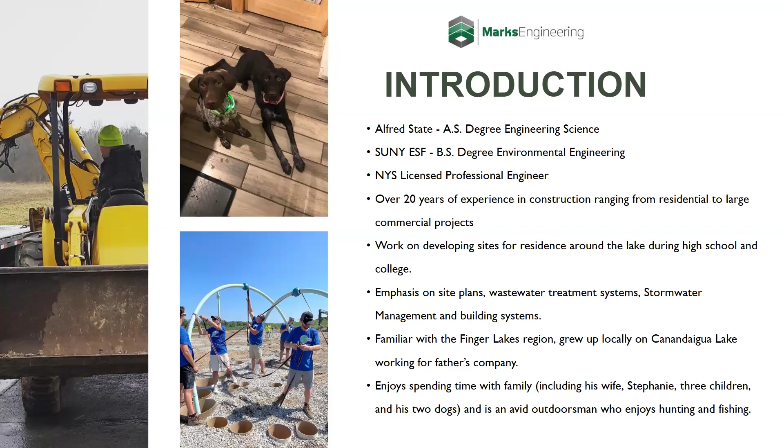So today we're going to talk about stormwater. First I'm going to talk about what is stormwater, do a little bit of definition, a little bit of explaining there, what the pollution is of concern, talk a little bit about regulations, what we can do to control erosion and sediment during construction, and then get into the site design aspects that we can do to enhance our new sites or retrofit some old sites with green infrastructure, which will include infiltration systems, filters, grass filter strips, rain barrels, pervious pavement, landscaping, and then we'll also talk about things we can consider going forward.

So what is stormwater? Stormwater is, by definition, runoff generated when precipitation from rain and snow melt flows over land or impervious surface without percolating into the ground. So that's just a general definition. But over here, I got some pictures. The big thing about stormwater is if you've got an open lot, it's grass, it's trees, rainfall is going to fall on it.

Most of it's going to soak into the ground and go into groundwater or run off slowly to streams or water courses. But when we develop these with parking lots and buildings and other impervious surfaces, we get stormwater runoff, and that runoff doesn't have the opportunity to soak into the ground. It doesn't have the opportunity to be taken up by the vegetation and cleaned of its pollutants or nutrients. So just a general, not a rule of thumb, just to try to make light of the situation.

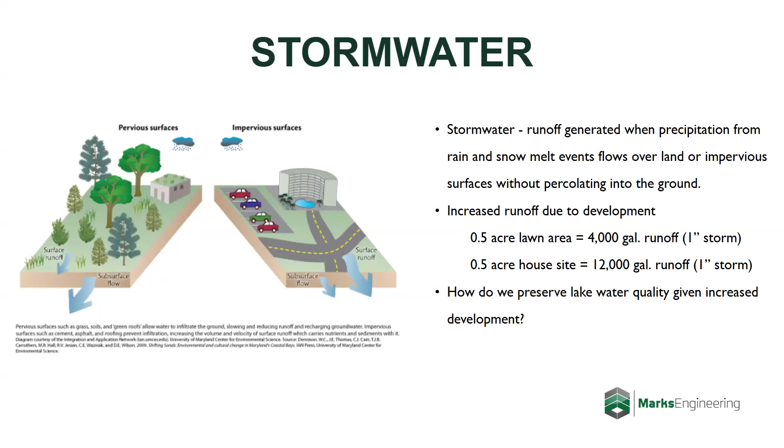If you have a half acre of lawn area, in a 1 inch storm event, you're going to get approximately 4,000 gallons of runoff. If you have a half acre house site, which is 30-40% impervious, you're probably going to get 12,000 gallons of runoff. So you're looking at like a 300% increase there for that 1 inch storm event. So that is just kind of a magnitude of how the runoff will be affected after you develop a site. So how do we preserve the lake quality or waterway quality given the increased development? That's what we're going to talk about today.

You've got natural erosion, right? You've got large storm events which erode stream banks, and we're also not going to talk about that. That's a naturally occurring erosion. What we're talking about is the developed sites and what kind of stormwater may be coming off of your house site or a new parking lot. So impervious areas are a big contributor to stormwater pollution, where you've got pet waste, fertilizers, motor oils, detergents, chemicals, litter on those impervious surfaces. And then that just basically gets washed off in a storm event and gets into the nearest storm drain and ultimately the lake.

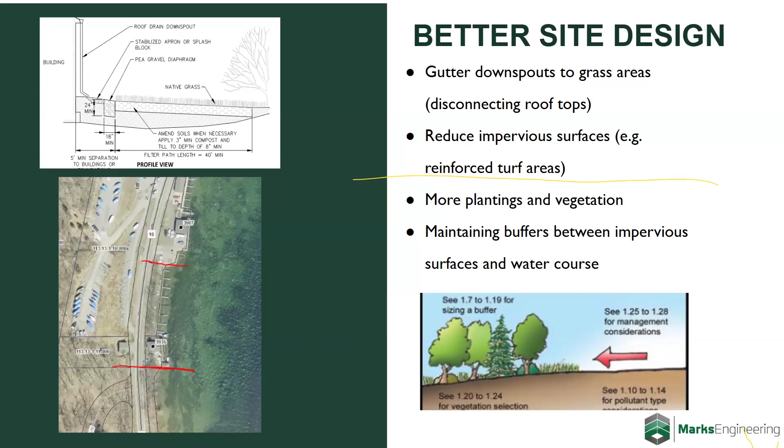So there's green infrastructure for. See if I can get that out of there. Hang on.

Well, I can't. So green infrastructure for small projects, retrofits. So that's one of the things I wanted to focus on with this presentation: what can you do as a homeowner on the lake or a homeowner on one of the streams or tributaries? What can you do to help reduce your stormwater footprint and help reduce the pollutant and nutrient load that's going into the lake? Or if you're building a new site, you'll see some of these things implemented, and you'll understand why we're doing that and what we're trying to achieve.

So we'll talk about rain gardens. I know it's a buzzword. Everyone kind of talks about it. Let's put a rain garden in, and they're very helpful. They're a really great retrofit. They look awesome. A lot of times when we're designing new sites or doing retrofits or renovations, we're also doing infiltration trenches, which work the same way as your septic system. Basically, water goes in and it percolates into the ground. Grass filter strips, those are common. We're going to talk about pervious pavements. We're going to talk about vegetation and tree plantings.

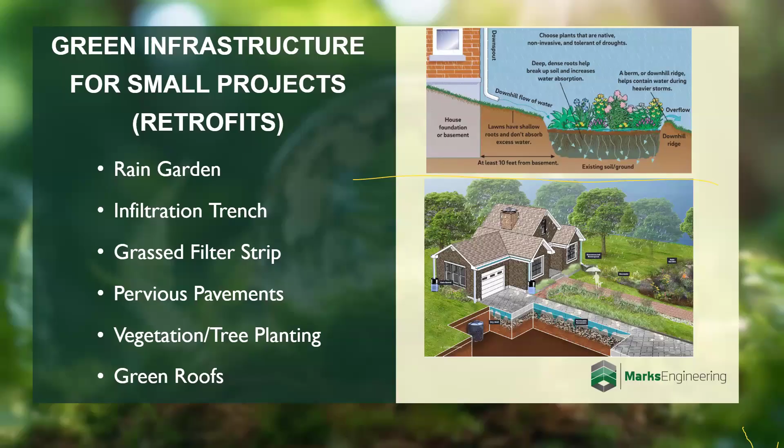I have green roofs on here. They are a green infrastructure practice. I'm not going to talk about them too much. They have more of a commercial application, so there are very limited green roofs in residential. And if you need to talk about it more, I'll be glad to answer offline questions.

So the rain gardens, very simple. Your downspout or roof leader or even a culvert or drainage pipe coming off site goes out across the ground and into an area which is depressed, which is lowered. It's designed as about 1 to 2 feet deep. It's got a bunch of wetland planting mixes in there. It's got usually some type of a mulch, whether it's hardwood mulch or stone mulch. You've got a 12 to 18-inch filter media, and then you've got a collection area, which is usually gravel, where it percolates into the ground.

And if you don't have great percolation, or if you don't have great soils for that to be absorbed in the ground, often we'll have an underdrain in there to siphon that water off the bottom of the practice. But the biggest thing is it's allowing it to filter through a sand media, filter media, which we know sand filters, like we use those for septic systems, they remove a lot of our organics and our nutrients and filter the water. They're very easy to install.

They're very attractive. A typical 2,000 square foot house needs about 100 cubic feet, which is about a 10 foot by 10 foot area. It's about 2 foot deep. Obviously, you've got grading outside of that. A rough order of cost would be about $10,000 to put one in. Obviously, site specific. If you've got a lot of grade to work with, that's going to change. But they're a relatively easy practice to implement.

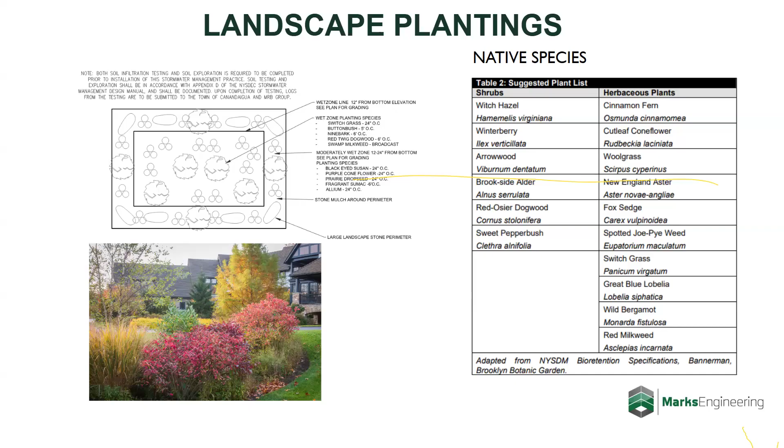So I'm going pretty fast here, but landscape plantings, we will specify planting zones. We have a lower zone, which is going to be your wet zone, where we want to put our plants that can have wet feet and tolerate being wet, which are your switch grasses, your button bushes. And then there's a moderately wet zone, which is going to be a little bit higher than that. Those are more your upland species or emergent species. We always like to use native species. We don't like non-natives or invasives, especially. This table here is from the DEC handbook where they specified some of the native species that they recommend.

So things to consider, the biggest thing with stormwater is the impact on the lake, right? The phosphorus loading. We were trying to reduce that so we could reduce our algae blooms, reduce the runoff, keep as much on site as we can, promote as much groundwater recharge as we can by focusing that into the ground, to percolate into the ground. So some of the stormwater retrofits are very easy to install. They're relatively inexpensive.

The dispersed treatment. So if you don't have a central stormwater pond for the whole subdivision community, dispersing that treatment to all the little residential sites, so everyone's got a rain garden in the front yard, is actually a better treatment practice than having that central stormwater pond. You're going to get more recharge. You're going to get more treatment. It's actually going to look better. So we call it dispersed treatment. The same thing with wastewater treatment. We try to have septic systems all over the place versus one municipal plant.

Things we can do as a community to get involved really is that public awareness.

Understanding what happens to your stormwater, where it goes, what it does. But it really is a paradigm shift here. When we are doing site plans, some of our clients or some of the people that are involved will look at it like, wow, why do I have to do stormwater? The lake's right there. We just pipe it out and it goes away.

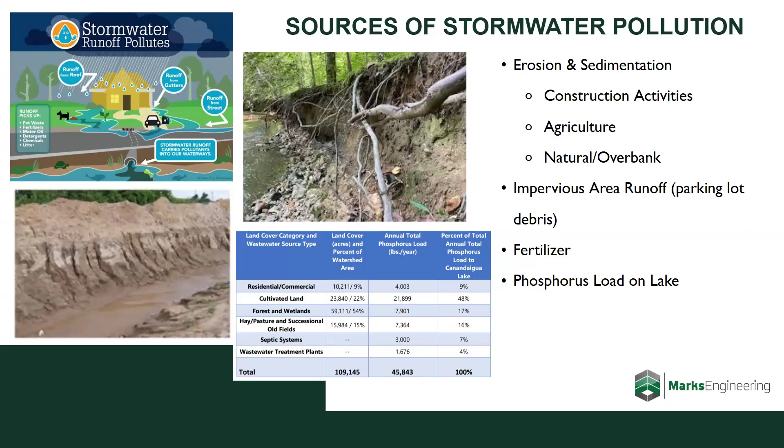Okay, thank you. All right, let's see from Ben. What permeable driveway surface is best for plowing? That's a very good question. The best one, which is the least common, is going to be porous concrete, in my opinion. It's a rigid surface. However, it's very expensive and it would be very hard to place. You actually put it down with a paver. Oh, there you go. Second to that would be pavers.

Again, I have not had a lot of experience with porous asphalt, but I tend to shy away from that. And plowing with pavers, you need to inform the plow driver that they have to use shoes on their plows so they don't tear up the pavers. And most plows don't, and they'll grab an edge of a paver and rip it out.

All right, thanks, Brennan. From Tom, how is water from a roof different from rain that falls directly into the lake? Well, that's a good question. Well, before there was a roof, it was a grass area. So that water was able to get captured into the grass and recharge into the ground. Obviously, water falling directly from the sky into the lake...

The roof water would have more organic debris, such as leaves and dust, pollens. There's obviously animal waste on your roofs, and the asphaltic shingles are usually a petroleum-based product. So you have more nutrients that way, more pollutants.

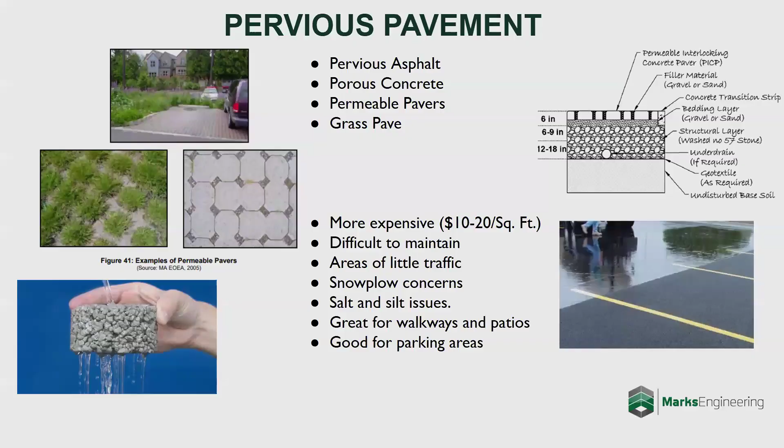Thank you. From Jim, are pet waste a problem for stormwater runoff pollution? Yeah, they are. They're probably one of the top contributors for an urban or suburban community, or a community like Fallbrook Park or Fallbrook, which has a lot of very close houses. And if you don't pick up your pet waste, it's definitely getting to the lake. Yes, for sure. For pet waste, animals in the wild have diets very different from domesticated pets. So there's a lot more bacteria and things that could be dangerous to get into the water. So good question.

From Ben, I'm sorry. If time allows, would be interesting to hear about agriculture from home and you. I don't see that question. It's not up here. Could you repeat it? It sounds like if there's time, would be interesting to hear about agriculture. I'm not really sure what that means. Ben, did you want to specify? Maybe just some thoughts on agricultural best practices. I'll let him clarify his question. We can go on to Lynn's question. Do you have anything specific you'd like to ask in regards to agriculture, Ben? I'll let you type that in and I'll read Lynn's question here.

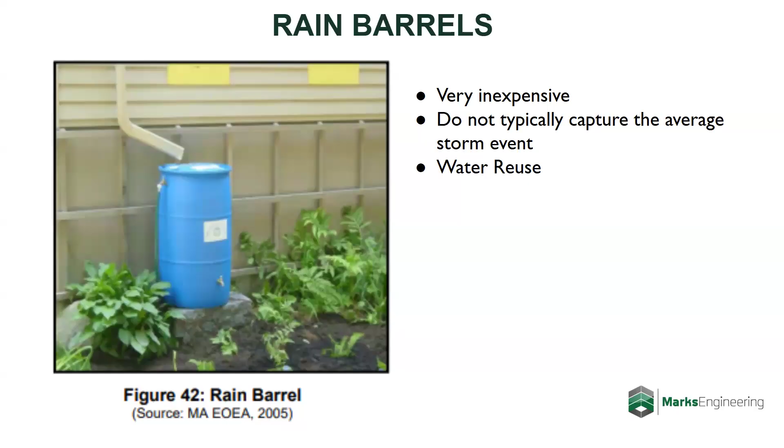But when we see a high water table, if we know that the lake elevation is pretty close, we'll probably go more towards a grass filter strip or not an infiltration practice, something that's more of a surface practice that doesn't have that large filtration media and that underdrain. So we would focus more towards the surface practice. Great.

Let's see, do I have another one in there? And it looks like I have one more from Jim. He's just saying great presentation, lots of useful info. And oops, I just popped in some other ones there. Lots of info and tips for individual property owners. Thanks and keep up the good work. I second that. Thanks from AJ. Lynn is saying wonderful presentation, Brennan. As always, I have a rain garden, interesting to watch at work all year round. So glad you are involved in this community. Awesome. Thank you.

Any other questions, folks? Oh, here we got another one from Ben. Are swales ever built on public land, or does government ever buy small parcels for swales? That is a good question, and I think so. We're looking at the municipal approach or the community approach. Yes, the watershed. Kevin's very involved in it, but they have purchased corners of fields all over the watershed, or sometimes whole fields, and they put in these large basins.